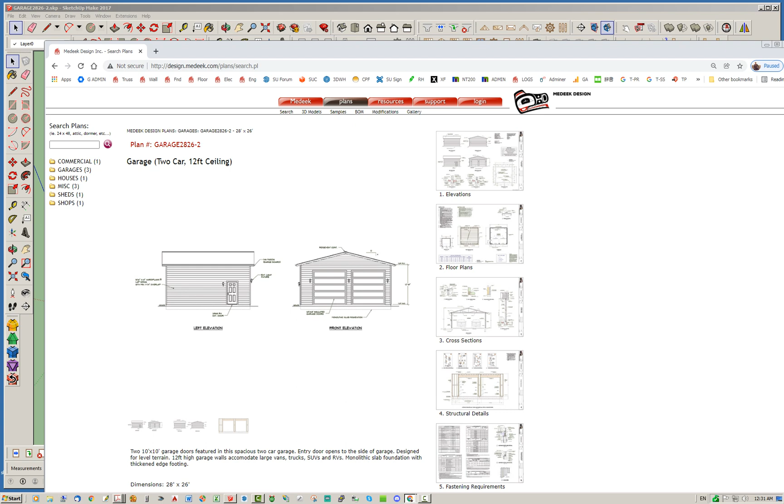I have this particular garage plan that I designed about 4 or 5 years ago. It's a rather small garage, pretty simple in design, basically a box with a roof on it. I just want to take this one from top to bottom. It might take an hour or so, I'm not quite sure. I haven't really spent a lot of time preparing or laying out what I'm going to do, but I have some general ideas in hand.

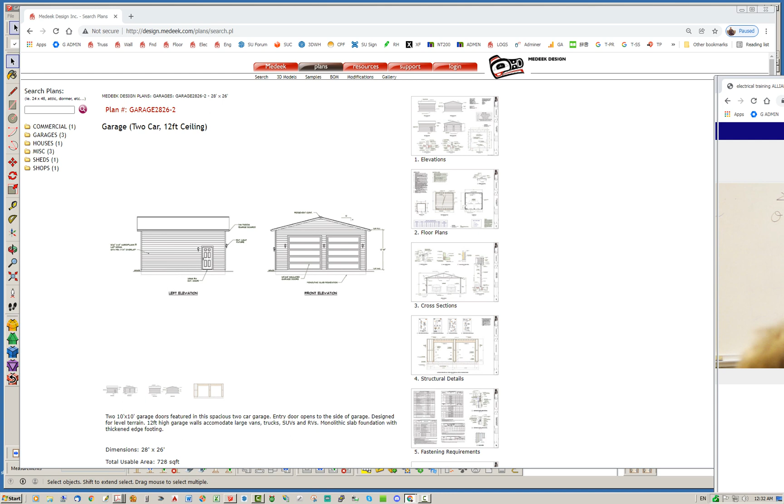So let's jump into it here. I'm just going to close this out. I've gone ahead and downloaded the PDF sheets of all of this. First off, I'm just going to start with the elevations here, just to show you kind of what we're dealing with, so bring those into view.

What we've got is a simple gable roof with a 12-foot wall, a couple garage doors in front, a man door on the side. We don't show a window, but I think I'm going to throw a window on the one wall, just to add a little more interest into the design, maybe on this wall right here, on the opposite wall of the door.

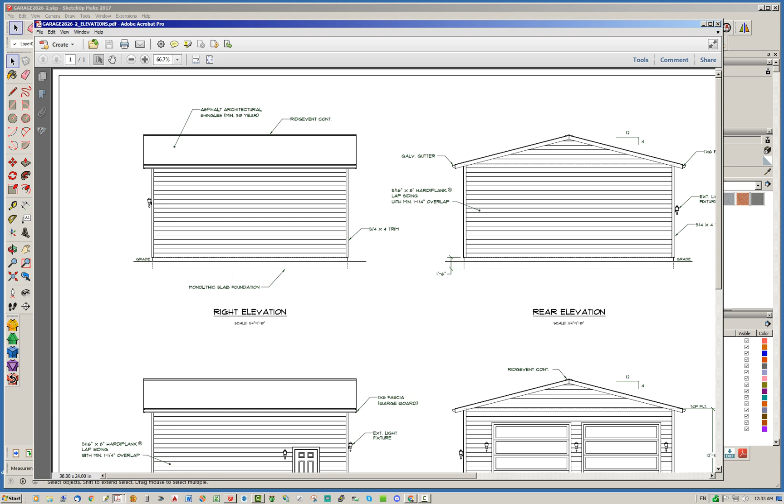Pretty basic foundation, slab on grade. It's a 4-inch monolithic pour, thickened edge concrete slab with some wire mesh reinforcement. You can get an idea what I'm dealing with here. I'm just going to let the plug-in space out these anchor bolts, 6 foot on center, and then we'll have to adjust them a little bit for the doors. But we'll let the foundation plug-in do its thing.

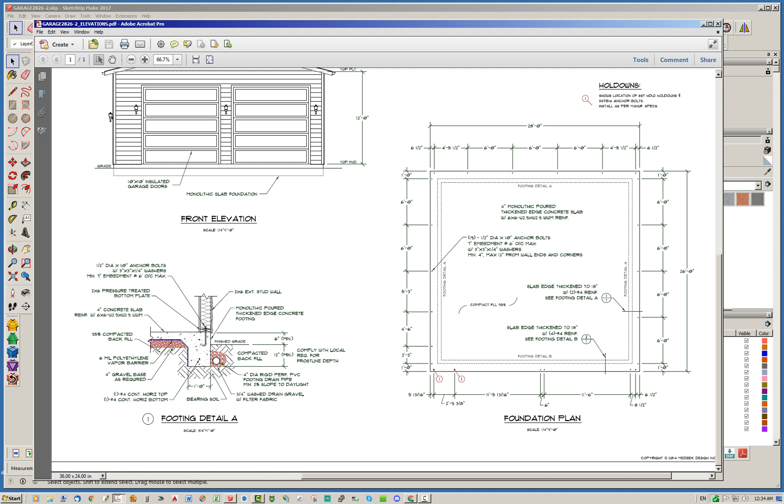So we'll dive into this here, and I just wanted to show you one other sheet. Let's bring up our floor plan here, just so we have that to take a quick peek at. So, it's a 28-foot by 26-foot outline.

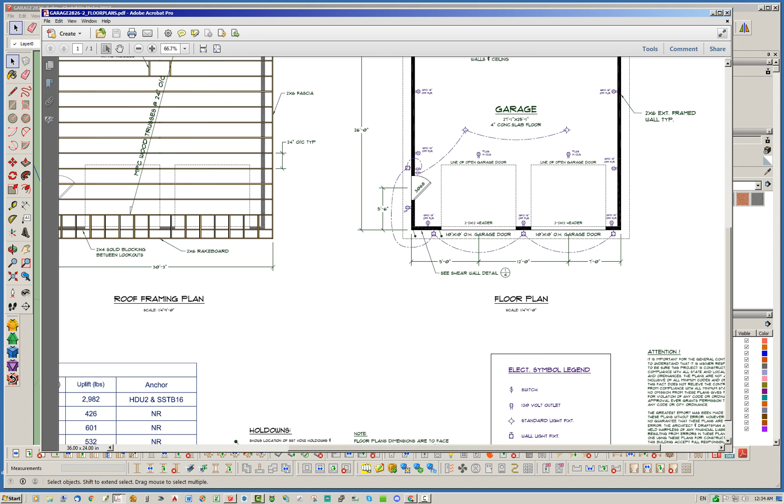Like I said, it's got the door here on the one side, and then we'll go ahead and put a window maybe on the opposite wall, right in the center of the wall. There are 2 10 by 10 overhead garage doors, spaced accordingly, 5 foot, 12 and 7, there in the front.

We're going to have one little kind of shear panel in the front. I haven't really stipulated an actual shear wall, but I did call out a couple holddowns in the original design, and I didn't call out any more holddowns because based on the site it didn't require them. But I think we'll probably also drop a couple HDU2 holddowns on each of those far corners as well.

So yeah, it's a basic design, but I think if we walk through this, we'll get an idea of what we need to do. I might take a little intermission along the way, just to take a break, and I'll pause my recording, then start right back up into it.

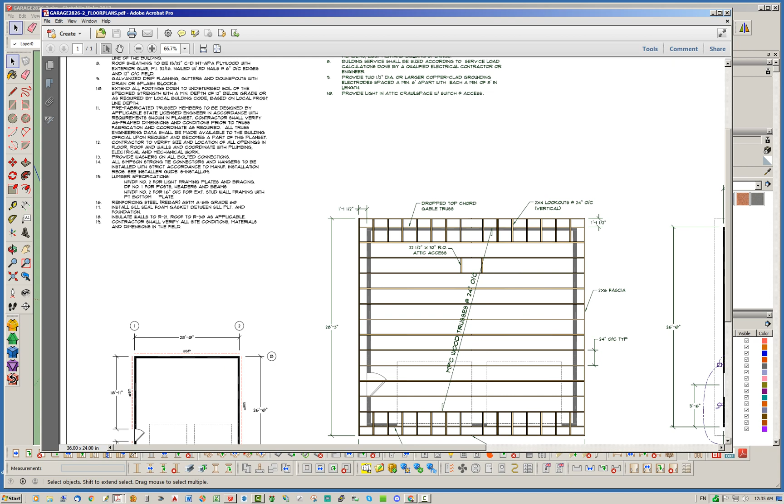Okay, so let's go ahead and look at SketchUp now. With SketchUp, I've just quickly made this little layout, kind of the outline. So let's go ahead and start with our foundation.

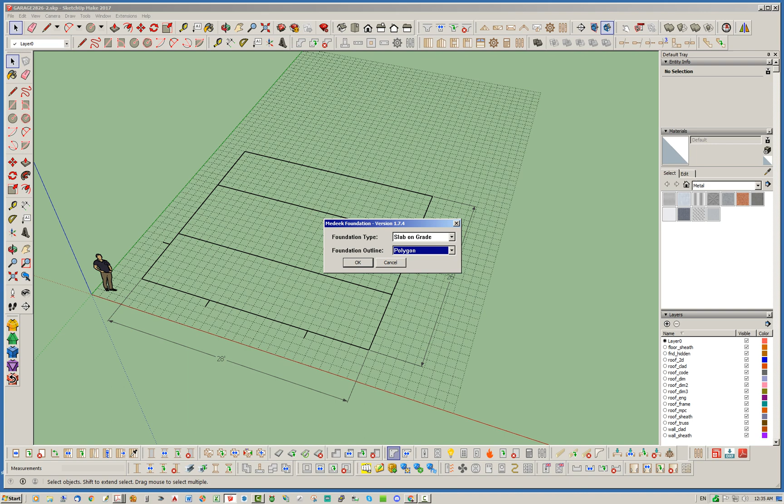So we're going to do a slab on grade, and we'll use the polygon tool only because I just want to demonstrate that. So we'll hit OK. We'll start at this corner, and we'll just stretch out, wrap ourselves around, and we just got to get ourselves back to the start point.

And right there, okay. Once you hit the start point, it recognizes that you've closed the path, and it will then prompt you for everything else.

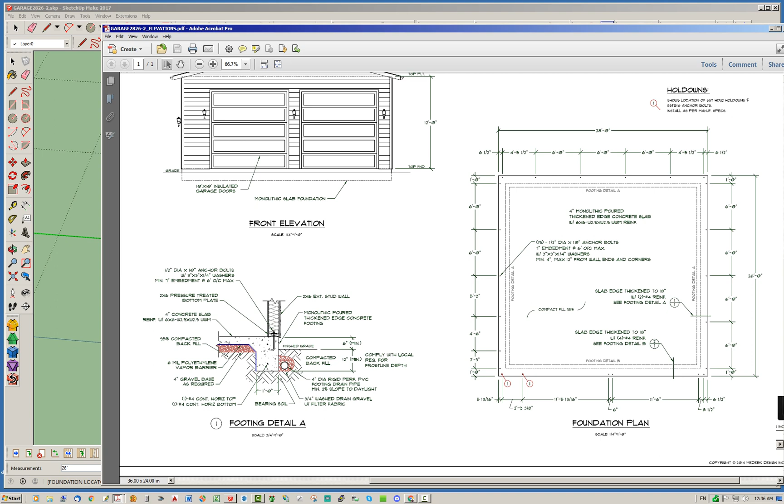Okay, so 18 inches on the depth. I think that's what we had on that cross section, and I think it was also a 12-inch width on the footing. Yes, curb width. No, there's no curves. Reinforcement, yes. Anchor bolts, yes. We did show a drain pipe, didn't we? Let me check my elevation view. I think it was. Yeah, so we showed a 4-inch drain pipe, so we'll throw that in there. We could always edit it later, but let's go ahead and see what we get. Then we'll hit OK.

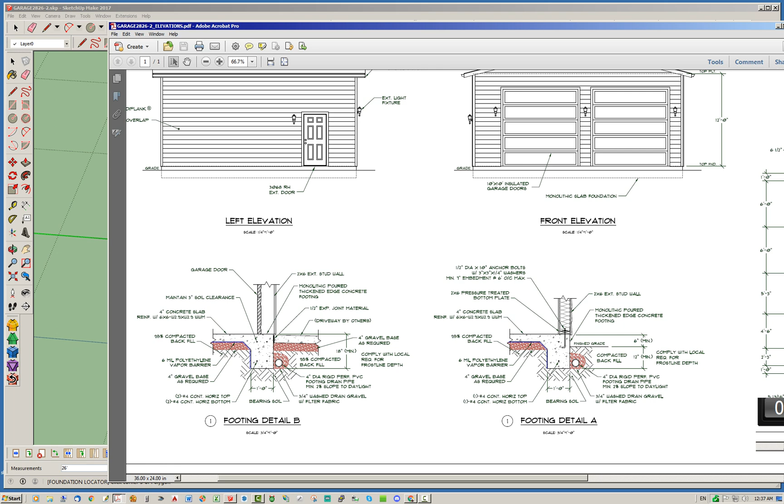Top bar, I think we had 2 and 2, but I could be wrong. Actually, the footing shows 2 bars, probably in the front, maybe 1 bar on the other side. But I think we'll just go with 2 bars all the way around. So 2 bars top and 2 bars bottom. And then let's change this - you know what, I'm going to go with 3-inch number 3 bar at 24 inches on center instead of the mesh. Then hit OK on that.

And then anchor bolt, 6 foot on center. That's correct. And then the pipe diameter, that's fine. Just leave that as default, and let it do its thing.

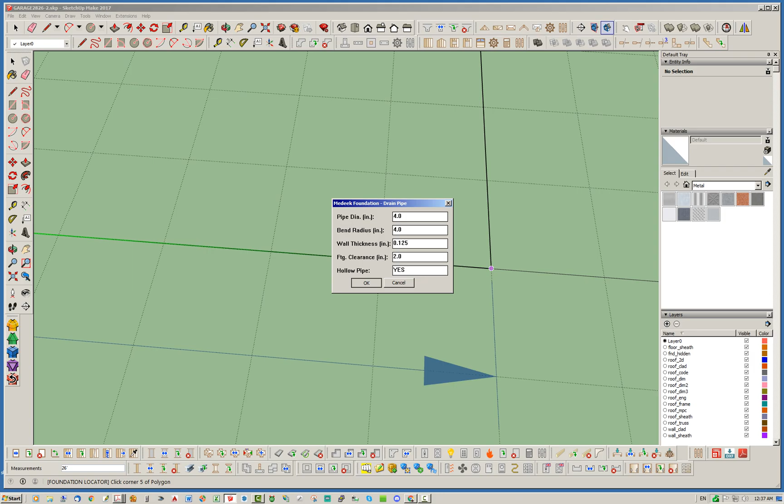Okay, so there's our slab. And just to demonstrate, let's change that opacity a little bit so we can see what's going on inside that foundation. I'll just leave that like that for now.

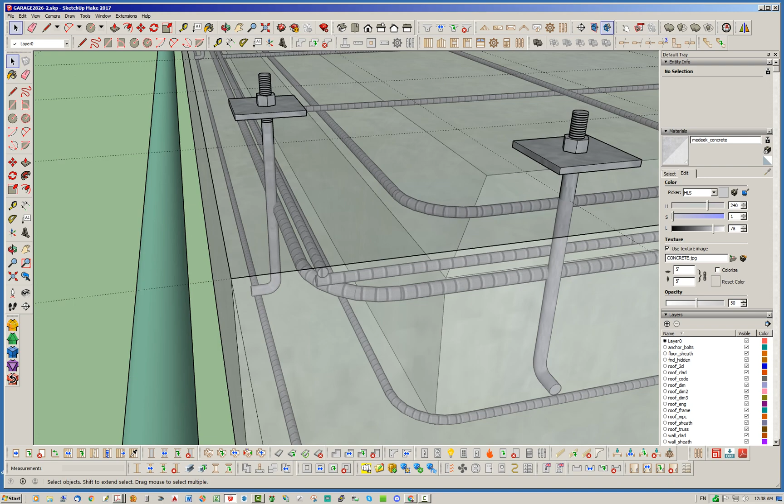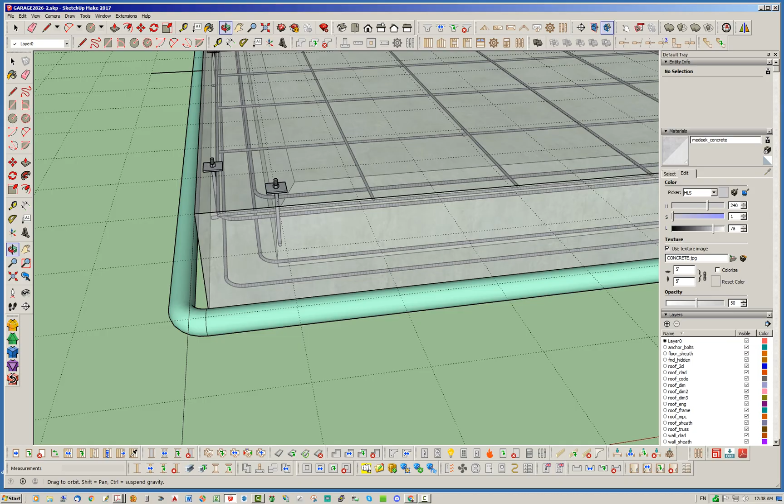Anyways, so we've got 2 bars on top, 2 bars on bottom. We've got ourselves a grid of rebar, and that looks good. We're going to have to probably modify the spacing of these anchor bolts as we go along here, as we can see. We've got some doors and we've got to move things, shuffle things around a little bit, but we'll get to that.

So that's our foundation. Okay, so let's go to the walls next.

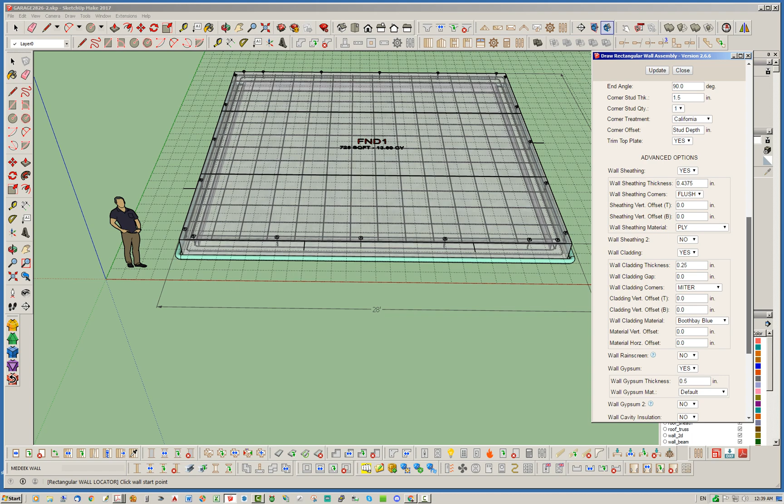So I'm going to bring up the wall tool, just a regular interior exterior wall. The wall height in this case is 12 feet, so 144 inches. 2x6 walls, stud spacing's fine, top plate thickness fine - pretty much everything default. California corners are fine. And we're going to go with that Boothbay Blue, I guess. Okay, so we just hit update on that.

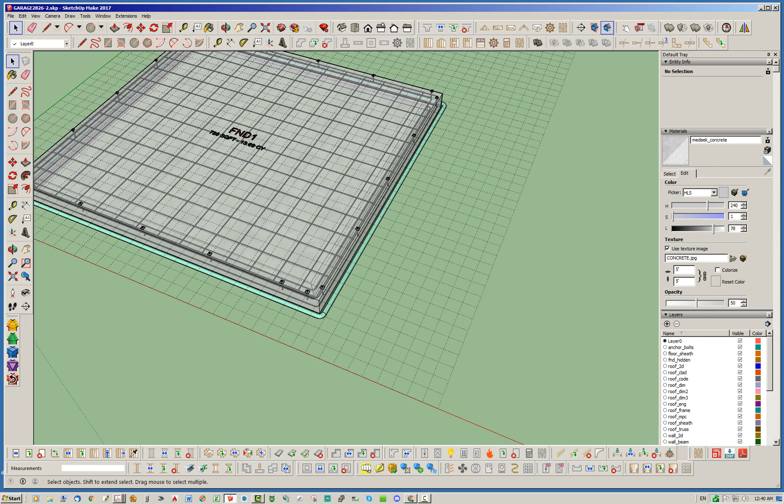Actually, before I do that, I'm going to just hide this - I don't need this right now. And actually we don't even need the grid, but we'll leave the grid for now. Okay, so let's go back to our wall tool. And sorry, we have to put that back in there.

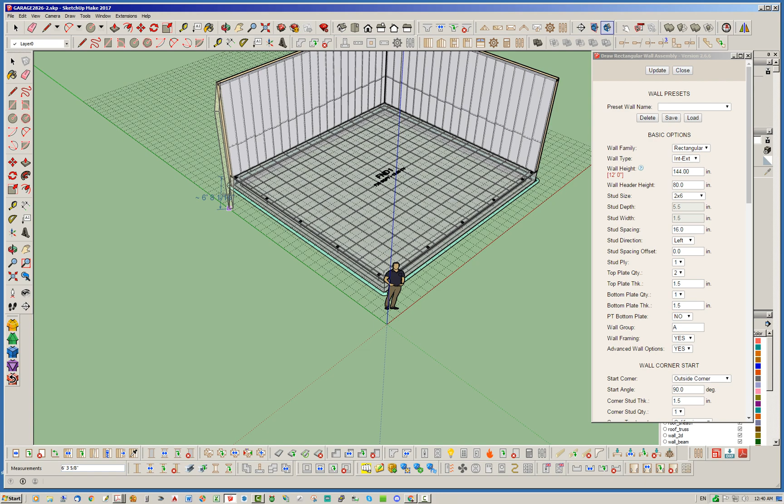Okay, so we just start at the corner and we start wrapping our way around. Pretty basic here. And then as we get to the end, we just hit our space bar - that jumps us out of the tool.

Okay, and it looks like we did the right direction, because you can see with the way this laps, that means this is the outside corner - the inset outside corner. Just to verify that, we'll turn off the cladding, wall cladding right now. You notice all these layers here - we've got layers being created automatically by the plugin, and that's controlled within the global settings of the plugin, if any of you aren't aware of that yet.

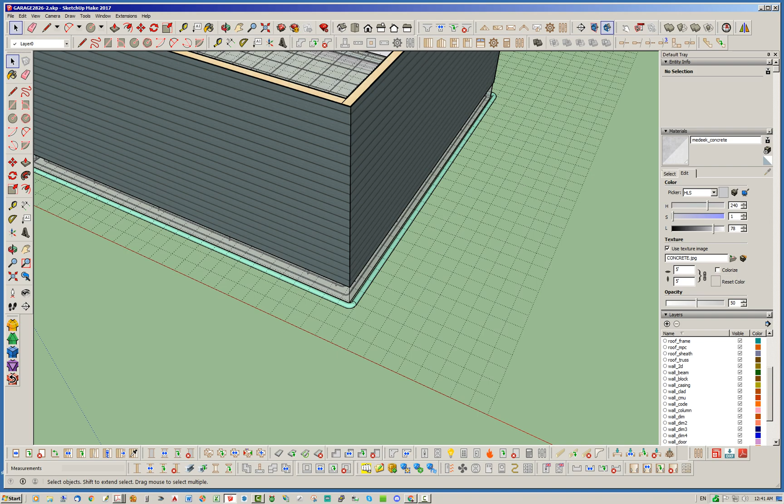So yeah, it's quite tall walls - 12-foot walls are pretty substantial, so it's actually a pretty good sized garage. And let's turn off the sheathing and the gypsum for now - we don't need those on.

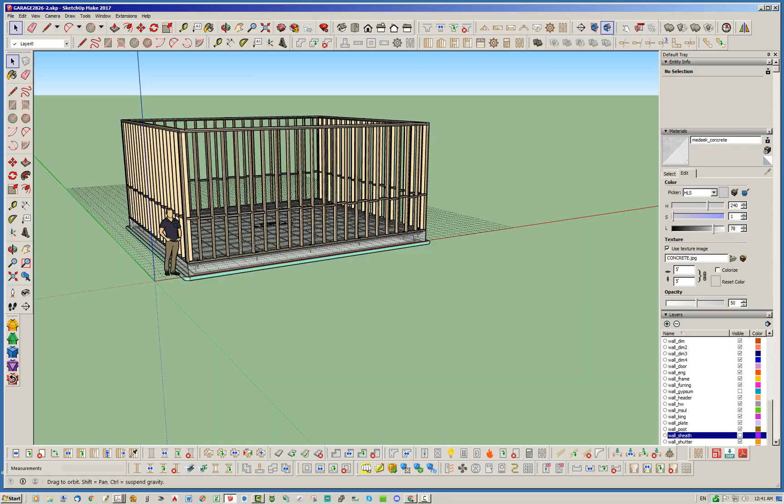Wall sheathing. Okay, so as you can see, we've got pretty big walls. Blocking wise, yeah, I'm thinking probably want a little more blocking there.

We've got blocking set showing on this one view here. I think we have it set at like 6 foot, but it might be useful to set that differently. In this particular case, you'd probably run a sheet of plywood vertically with 8 foot spans and then a 4 foot section. But yeah, I don't know.

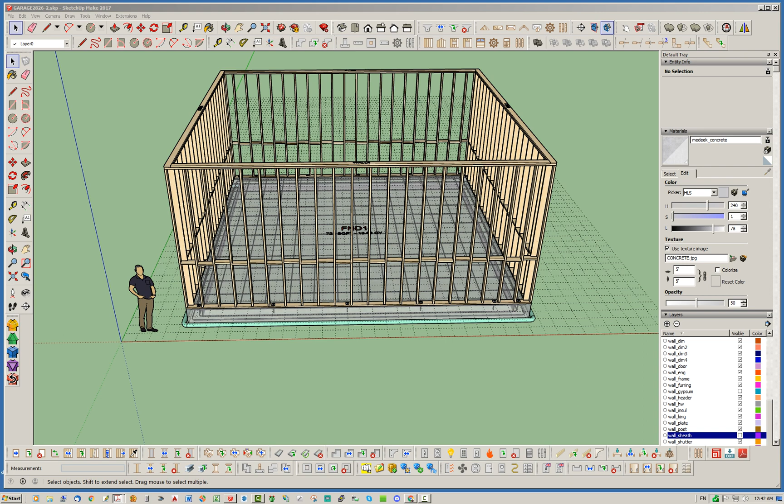Let's go ahead and just edit this wall assembly real quick, and we're going to change the blocking to 48, and then let's do 2 rows of blocking. Let's see what that looks like. Yeah, I think I like that a little better.

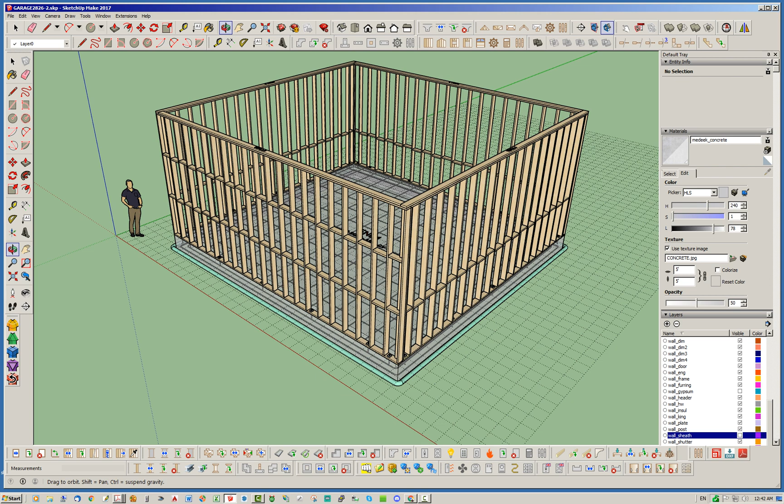Okay, so we could go around each one and edit, or we can just use the wall copy tool. So I'm going to grab this one, go down here, turn on the blocking row spacing and blocking rows, hit update. Now when I click on any other wall, it should change just those 2 parameters.

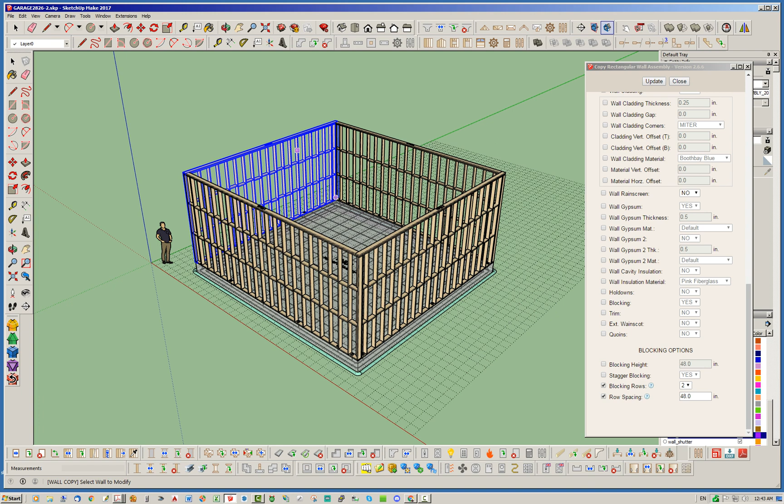And it looks like we are doing what it should do. Okay, well, excellent. So we'll close that out. So now we've got ourselves 4 walls.

Okay, so let's go back here and just look at this elevation one more time, make sure we're getting kind of where we want. Okay, so now I guess we can start dropping doors and windows into it.

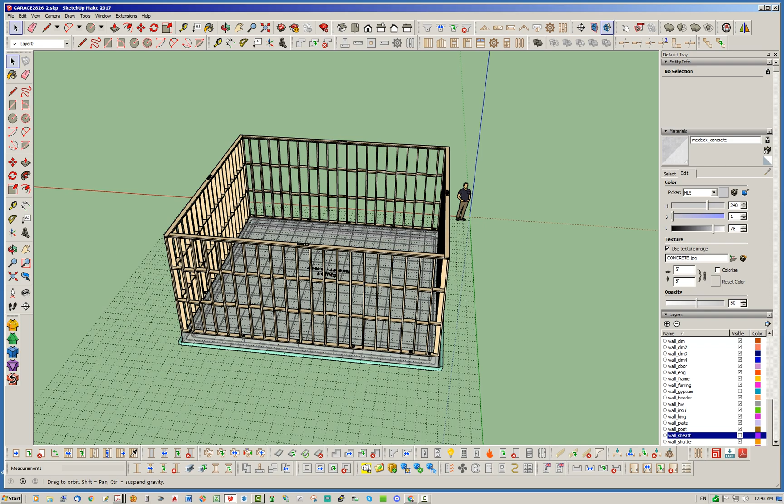Let's start with the man door, and we'll unhide our little layout here. It shows on the floor plan that the man door was positioned 5'6" from the corner.

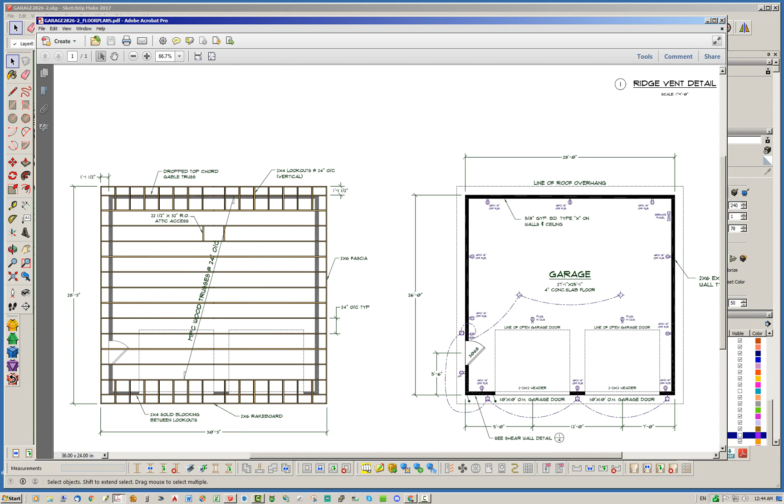Yeah, I mean, I could do that, I suppose, but I think I'm just going to put it at 6 feet. I don't think it really matters that much. So we'll just do that.

Okay, so let's grab a door here, and let's change our door header. The door headers, too, I noticed when I originally drew this plan, were kind of a foam insulated type of dealio. You can do whatever you want.

I'm going to go with, maybe just a couple. I don't know. Let's do a 2x6 fill ply header. How's that sound? I mean, it's probably overkill, but we'll just go with that. And then...

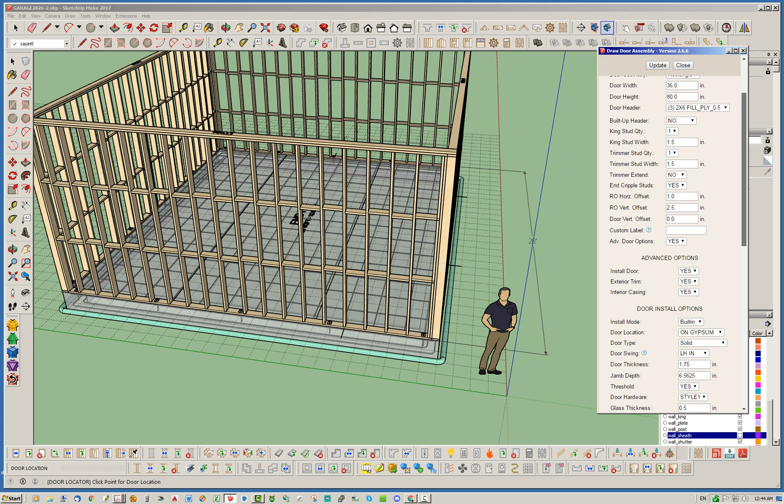Well, let's just create the door and then we can always change it up. Anyways, all the options are turned on, the install door, the exterior trim, and the interior casing. So when we mouse over this door, it should create what we want.

Okay, so the door opens the wrong way. That's fine. We'll just edit the door and change it from a left hand to a right hand in. Okay.

Also I noticed on the elevation view we showed a deadbolt. So in that case we can change up our door hardware style. I think style 2 includes a deadbolt. Oh no, that's the little other style here. Let's go to style 3. Yeah, there we go.

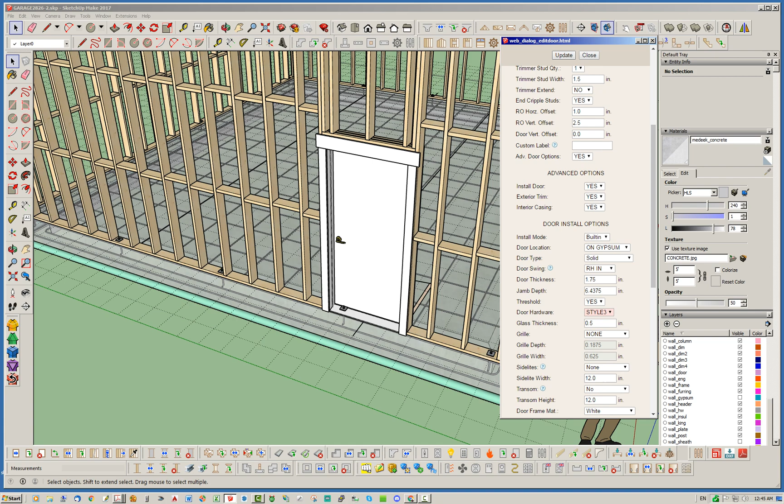Okay, so there's our man door. We could change up the case, trim, etc. Let's see here, what do we got? Okay, so I don't like that trim. Let's just go with something a little more basic.

Yeah, I have it overshooting on the trim there. So down here you can see you can change the header width of the trim to whatever, and then you can change the header extension down here to 0. So we'll go ahead and do that. Hit update, and now a little more basic standard type of trim.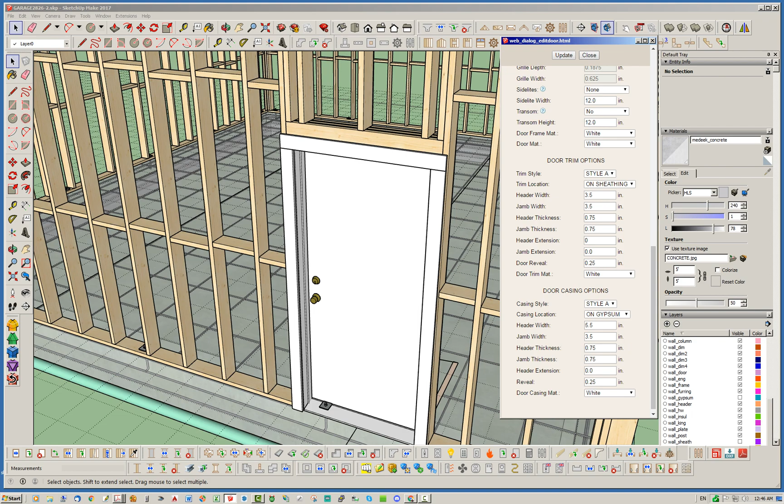Okay, yeah, so back to the header real quick, it's a triple 2x6 header. Let's turn off the wall casing, or wall trim, it doesn't really matter, for just a second here so we can take a look at that. Where is the wall trim? There's a lot of layers. Yeah, there we go.

Okay, so we got a 2x6 triple header. Yeah, that should suffice. Now notice how this anchor bolt is in the way. We'll deal with that once we get all the doors in, then we'll work on that.

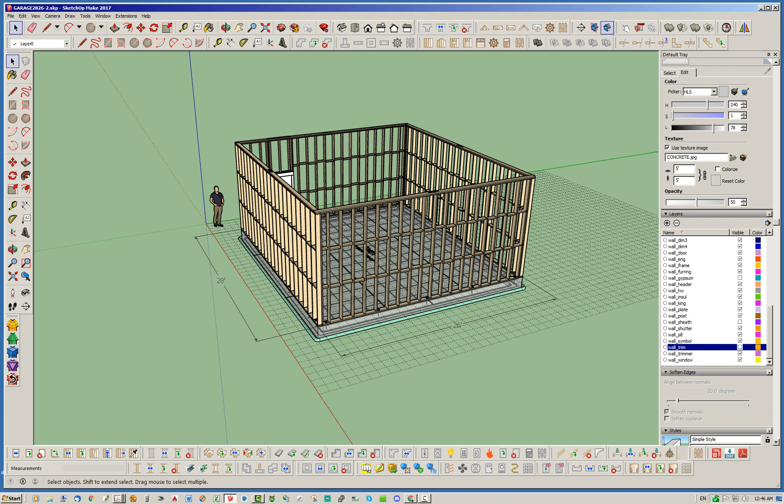Okay, so let's go over here now real quick, and let's throw a window in. We don't have a window on the original plan, on the original elevation views either. I just thought, for interest, we might as well throw a window in. I don't think it'll hurt.

So let's get a 36, 48 inch high. Let's say a... I don't know, we could have a couple windows actually. Maybe we'll do a couple windows. Maybe that'll look better. I don't know.

It's kind of boring not to have some windows, so let's go with the same headers as the other one there. Let's go with the filled ply header, and let's try a couple of these windows.

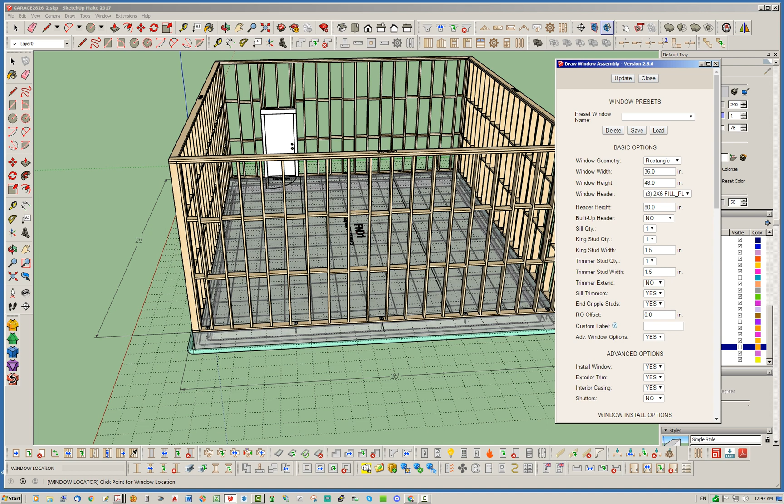36-inch windows, that looks about right. And you can see here as you mouse over the wall, it's giving you the distance from the end, as well as from the other end - 8 feet from one end, 18 feet from the other. I have both of those dimensions turned on.

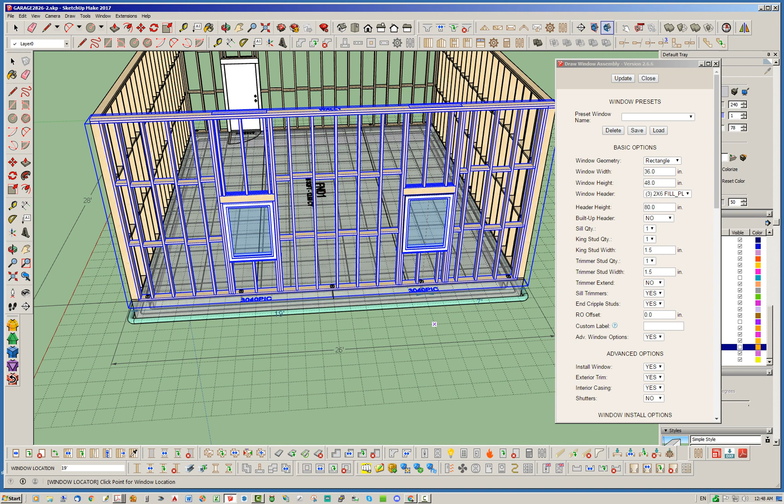Okay, so yeah, I think that looks great. I think that looks pretty good. So, 2 basic windows.

Maybe we want those to open or something, so let's change those up as well. I think right now we have them set as a picture window. Let's turn them into a single hung window.

I like the fact too that we can put a manufacturer's label on it, just so we know what we've got here. And I'm just going to hit update on that.

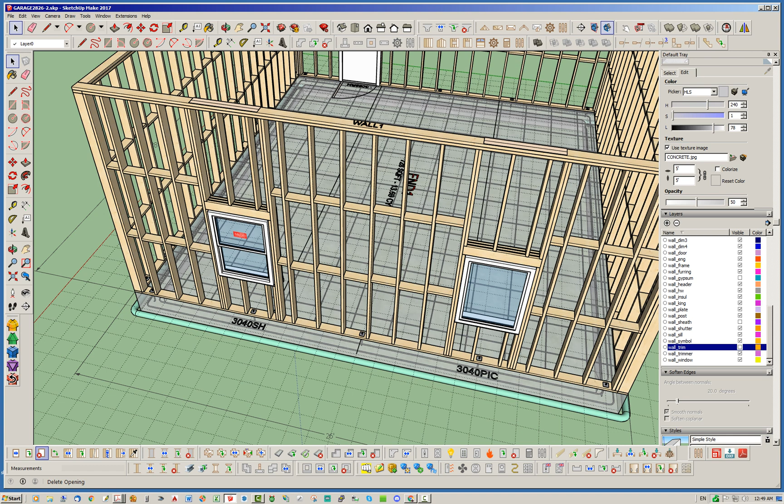Okay, and I'm going to come over here and do the same for this window, and change it to a single hung window, and then turn on the manufacturer label.

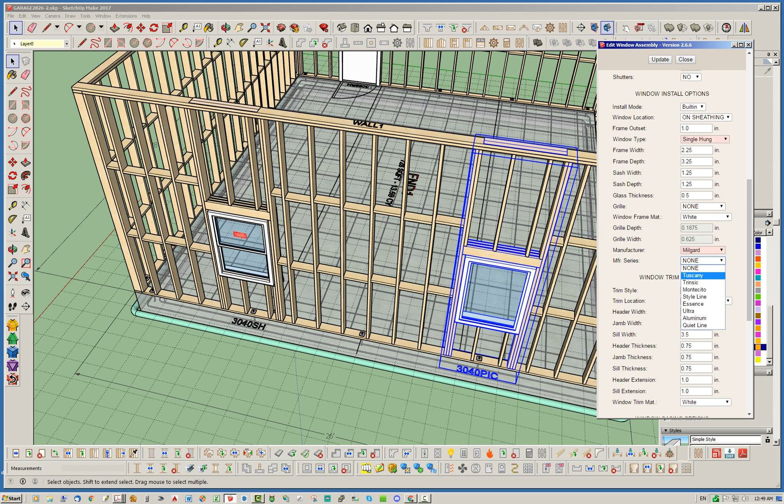Notice I have quite a few manufacturers. You can even put a manufacturer's serial number in there, or series number - well, not series number, but different series, some of them have numbers. Anyways, it's just whatever you want, but I'm not going to worry about that too much right now. I think that's a little bit overkill.

Okay, so we got our windows, we got our doors. We need to put the garage doors in next.

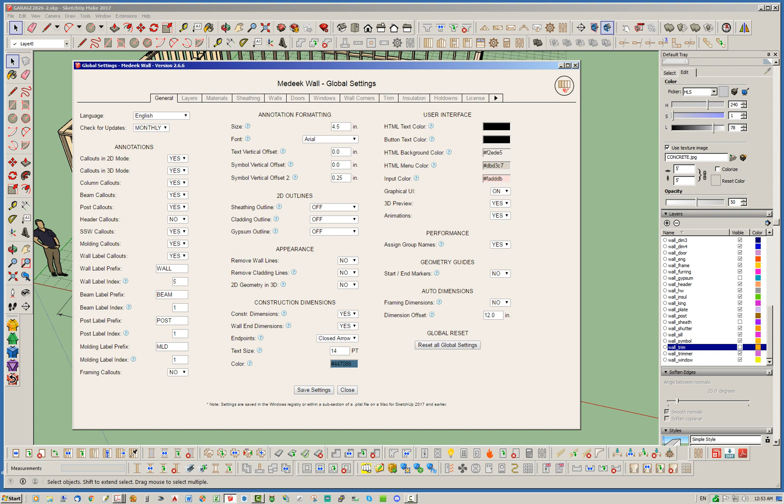So if we go to the global settings of the plugin, and then click this little arrow to get to the second page, we can go to the headers, and the headers library allows us to create, delete, or modify any of our headers that we have available to us.

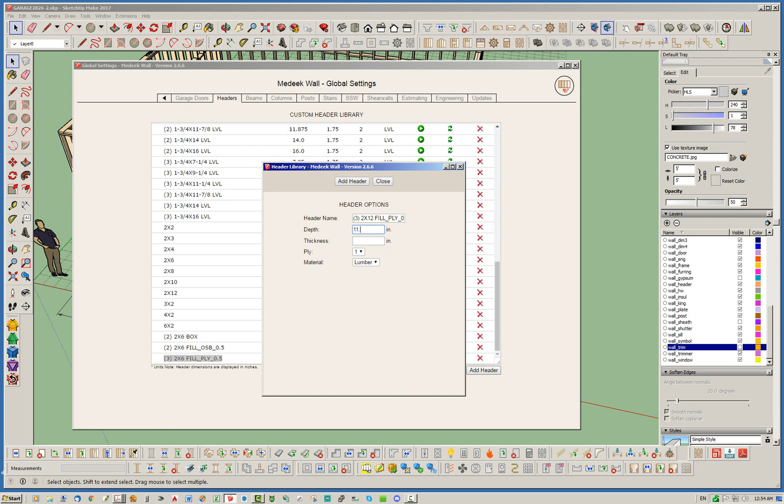So similar to this last one listed here, which is a 2x6 header, I'm going to create a new one. I'm going to drop this description in there, and just change this to 2x12. The dimension for the depth is 11¼ inches, the thickness is 1.5, and it's going to be a triple ply header. And we just hit add header.

Okay, so now you notice we have the 2x12, and you'll notice here, as I've described in another tutorial video, that you have this specific keyword combination. What this basically tells the plugin is that it's going to be a filled header or spaced header with plywood, and the thickness of that plywood is 1/2 inch thick. So that will instruct the plugin to generate the header exactly like that.

And the triple ply, this variable right here where we have brackets 3, 2, that actually doesn't do anything - that's just kind of for our own reference, so we know it's a triple ply header.

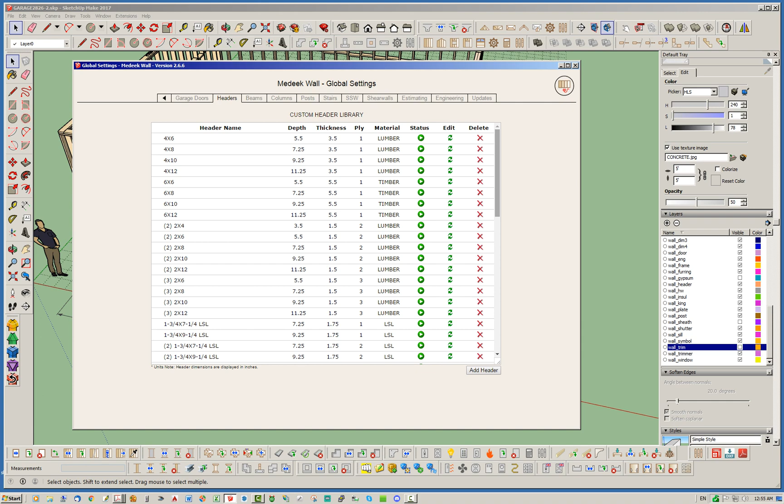This 3 tells us triple ply, so that will tell us we have a triple ply header. And of course the material we chose is just regular lumber. So let's go ahead and jump out of that now.

Let's go ahead and try creating a garage door. Basic garage door, we're going to do 10 feet, which is 120 inches high. And again, here at this stage, we select that special header we created, and right here we've got it.

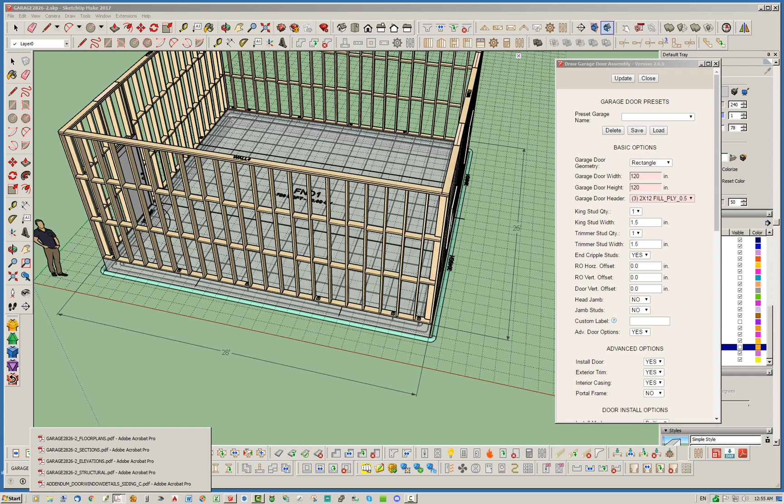I noticed on the framing, let's go back to that really quick here. On the framing plan, we showed like a double king stud and a double trimmer, so we can do that. We're going to go ahead with our double king stud and double trimmer. Hit update. And end cripple studs, sure, we can turn that on.

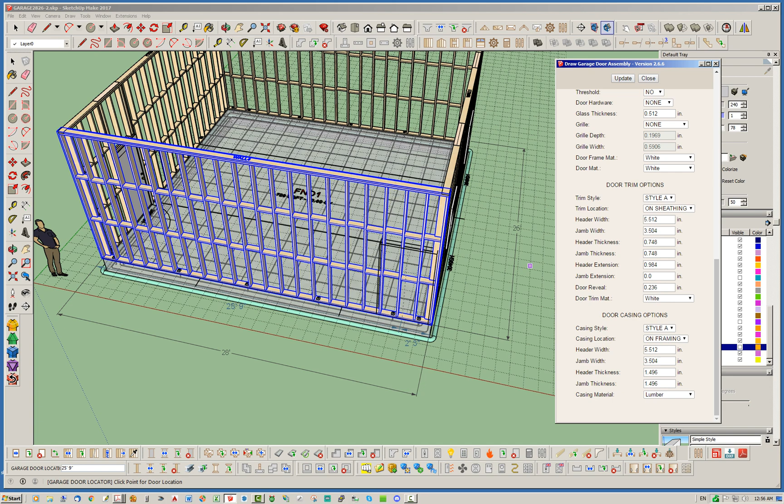We do show jamb and head jamb, but let's just leave those for now. It's not a portal frame. We have exterior trim, exterior casing, or interior casing turned on. Pretty much everything's turned on. We'll just leave everything default for now and see what we get. So we'll hit update one more time just to make sure, and we show our door.

I'm going to position this one at the 9-foot point, and I'm going to position this one at the 7-foot point. Let's just double check to make sure those two doors are where I think they're supposed to be. I already made these little points, but I just want to triple check that.

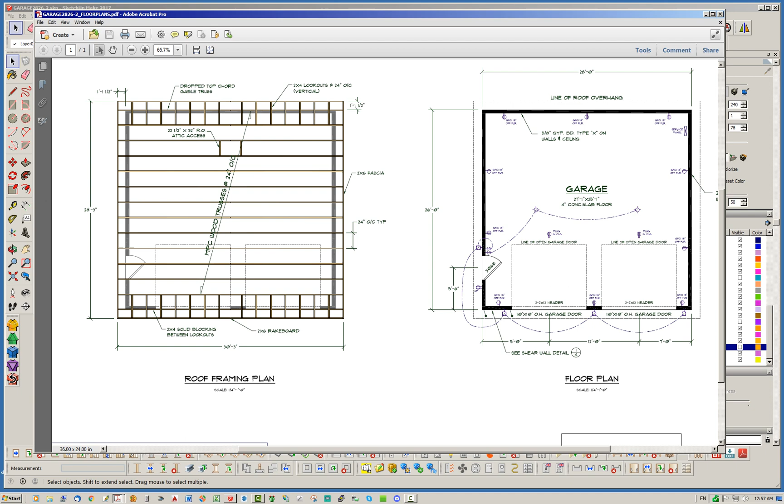So let's go back to our floor plan. And yes, 7 feet off the corner, 12 feet apart, 9 feet. Okay, so I think we've nailed it.

And instead of 2 2x12s, we've got 3 2x12s, a little beefier, but I don't think that's going to hurt us at all. You notice the door looks a little different than the elevation views because actually it is a little bit bigger. I think in the elevation views it showed 5 panels, and this one we've got 6 panels, if you remember this view right here. And that's fine, we'll go with that.

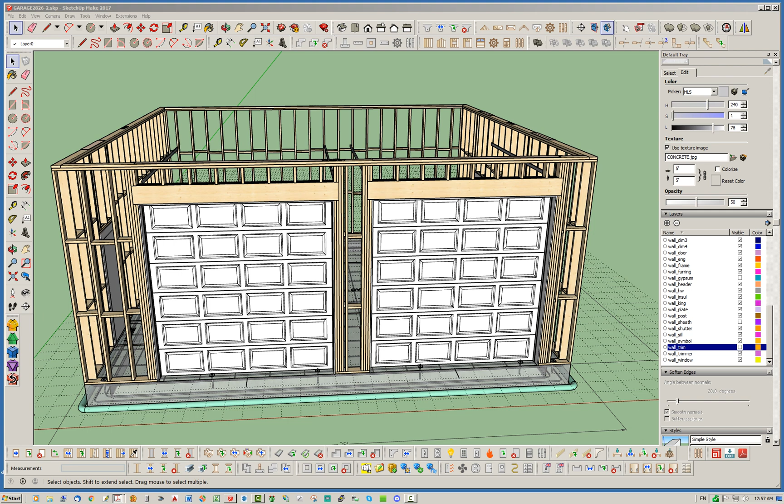Let's do one other thing here. Let's turn on that wall trim just so we can see what we got there. Okay, yeah, so we wanted to change that up just a little bit and maybe turn on the door handles while we're at it. So I'm going to click Edit Opening. I'm going to come down here to the...

I don't know why these numbers are so crazy, but they are. I think I set this up for a metric system at some point. So anyways, it's roughly, roughly there. Anyways, we'll change this up, it won't take me a second.

So header thickness 0.75, header extension 0, door reveal 0.25. Okay, that's better. And then the door casing option, you can see that they were metric approximations because I had run some metric stuff in here before. But yeah, we're not doing metric today. All right, I think we fixed that for the most part.

Well, no, one more thing here. That's fine, the jamb thickness, just leave that as is.

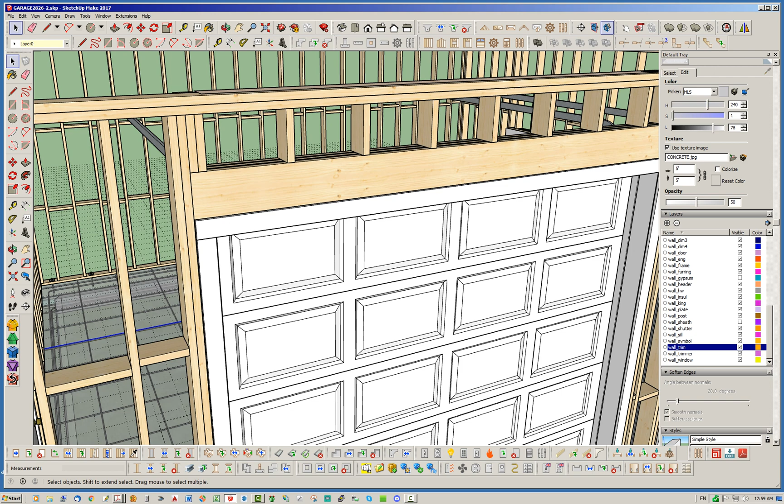Okay, so also in the structural view, we showed we had a top and bottom above that header. Let's see if we have that option available to us. I don't remember the built-up header thing, right? I can't remember if I added that in or not. I don't think I did. So we'll just go with the default here for now.

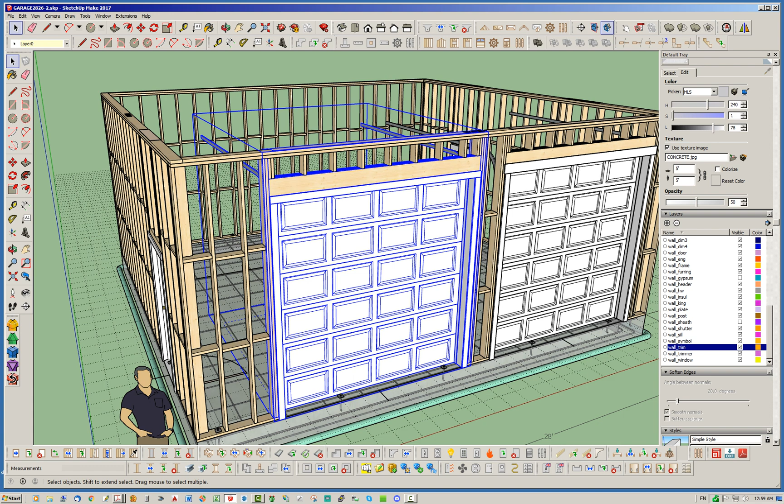Yeah, that's fine. And then I'm going to go ahead and fix the other door dimensions as well. I'm just going to pause you for just a second and we'll jump back in.

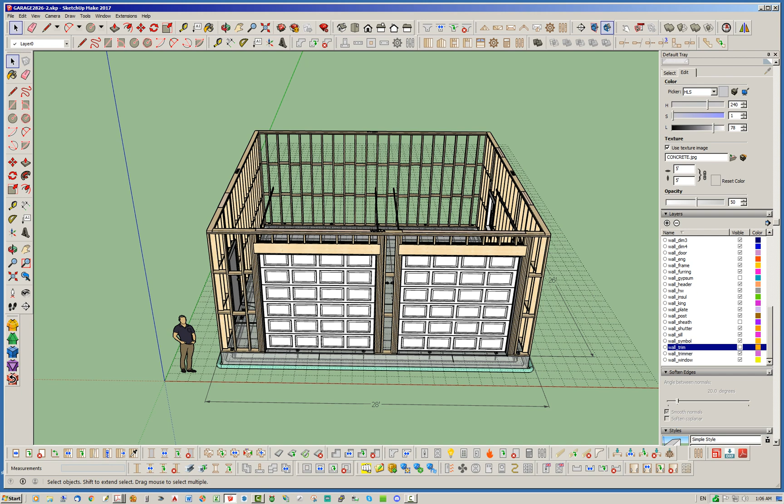Okay, and so we're back. I just want to turn off the wall trim for a second now because we're going to go ahead and add this shear wall panel. So there are a couple ways we can do this. I do have the ability to just add hold downs at the end of the walls, but I want to actually try to use the shear wall module as it's constructed, and so I'm going to try to demonstrate that.

So I'm going to go here and click the draw shear wall, and I've already kind of set it up. We're going to use triple 2x6 posts, just like it's shown in the plan, and HDU2s with SSTB16s.

These are all Simpson products, on both sides.

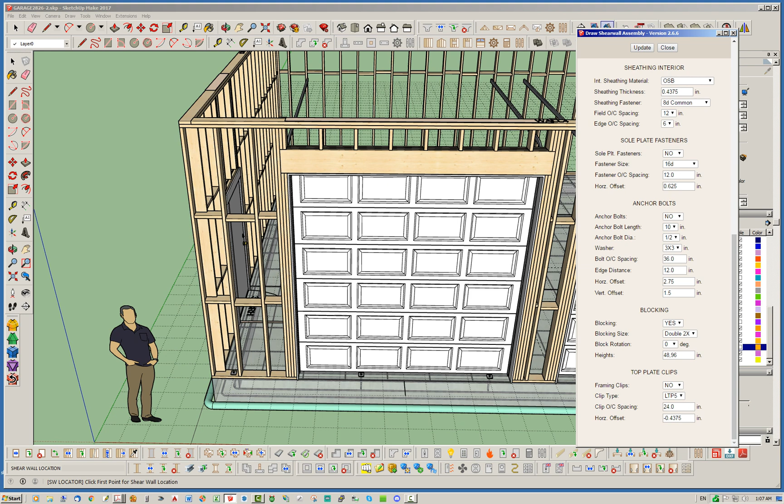Let's see here, we'll just leave that. I've got blocking set up, a double 2x blocking, which is basically two 2x6s nailed together and positioned at the seam where the plywood or sheathing is, and they're in line. We're going to run a row at 48 and one at 96, just like shown here, but on the shear wall.

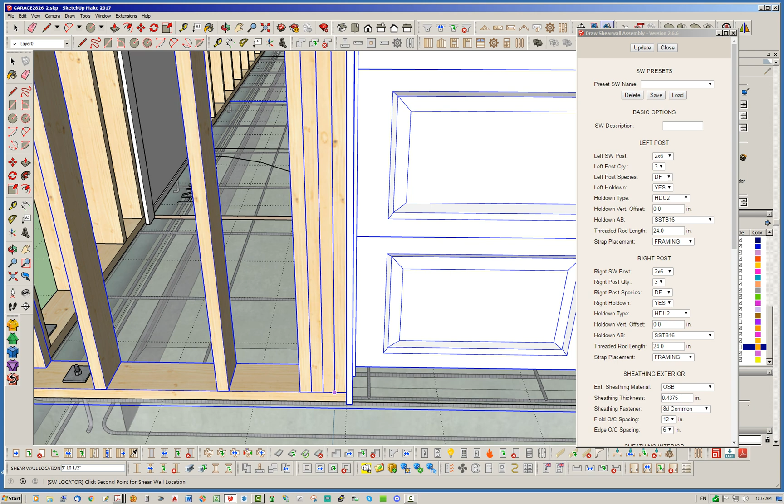So let's go ahead and hit update on that. To do a shear wall, you just mouse over the wall you want to place it at. We're going to start right at the corner and run to this point, a third stud in. And you can see that we've got our shear wall.

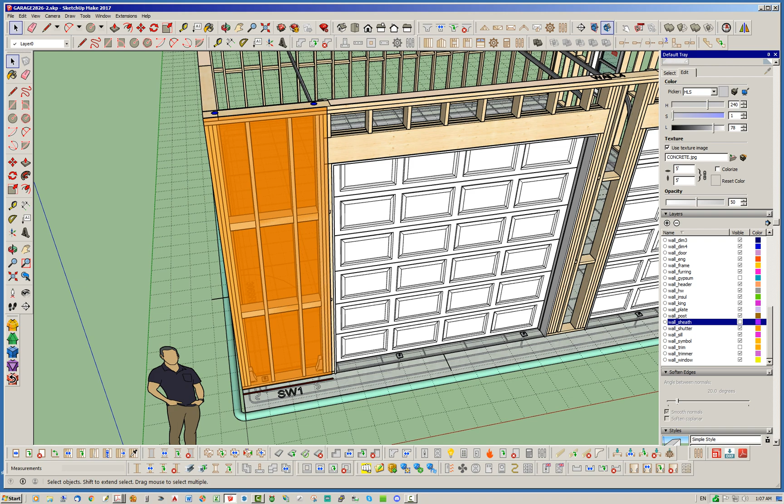Really, the sheathing of the wall itself can provide this shear wall material, and that's why I show it as a kind of transparent overlay. It just helps you see that this section of plywood has to be nailed off at a much stricter,

aggressive nailing pattern, I guess is the best word. For instance, maybe it's got to be nailed off at 4 inches along the edge and then 12 inches on center in the middle. Anyways, the other thing I noted too is that

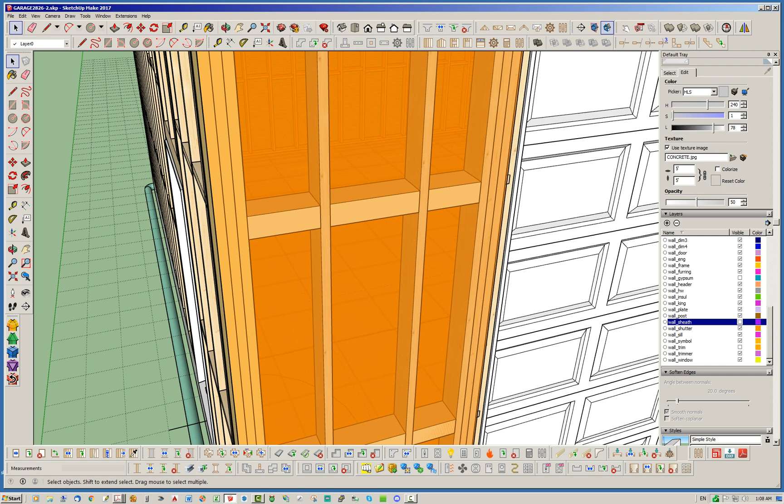the 2x blocking, when doubled up, shows as one solid block. I may change that eventually so it shows as two blocks, because that's really what it is, but for now that's what's shown.

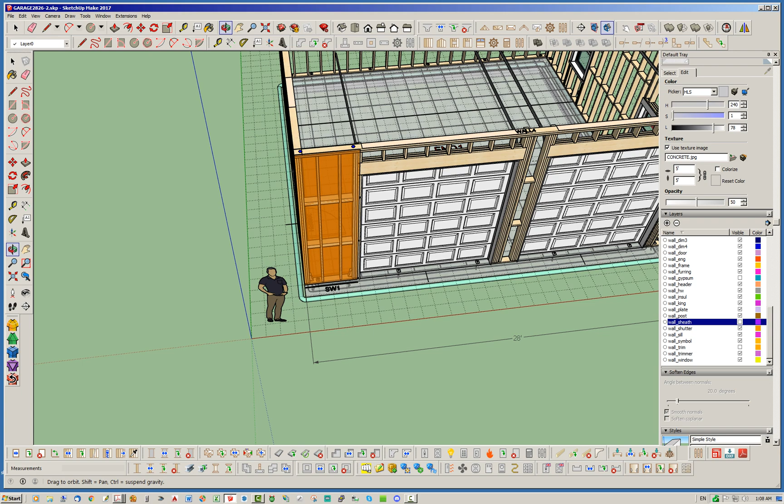Notice that your hold downs are shown on the top view of the wall, similar to how your doors and stuff are shown, and you also have this down here showing that that's a shear wall. So we've got our hold downs, we've got that. We may want to move that anchor bolt, and we are going to want to move that anchor bolt as well. So yeah, we'll get to that.

The other thing I wanted to say is that one of the things I would typically add in is some hold downs, strap hold downs, generally right at these doors where there aren't really any shear walls. But I don't have a system yet for just adding in hold downs, so what I'll do is manually add those in and make them what I call a custom object within the wall, so that when the wall gets regenerated, it does not delete those hold downs. We'll show you how that can be done.

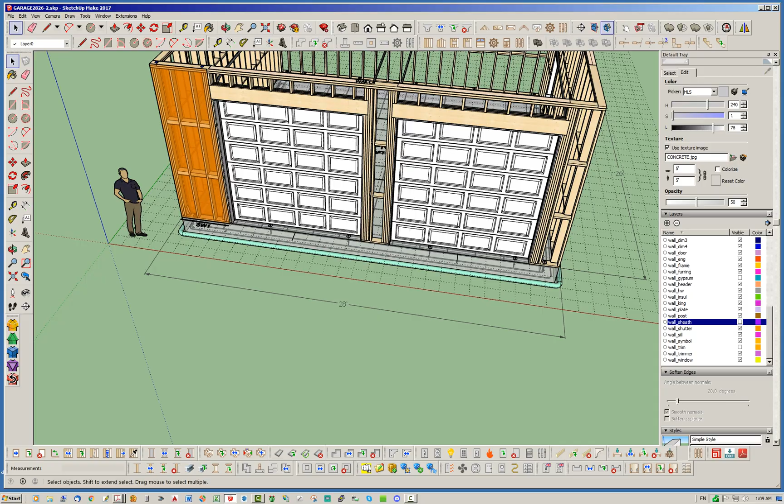The other thing is, at this corner of the wall, I want to strengthen things up a bit on this garage because it's pretty tall and big. So I think what we'll do is edit that wall and change this to a triple stud on the corner. Edit wall assembly, and it's just on the end wall condition here we're looking at, I think, is what we want to try to do.

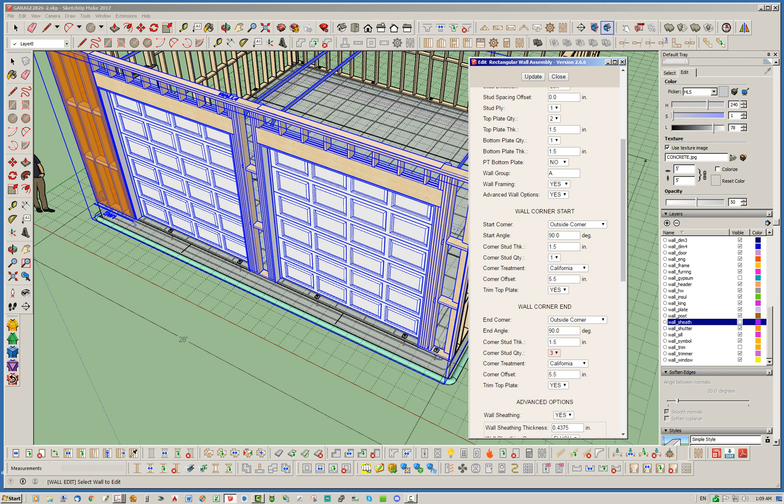Okay, and so now we've got ourselves a triple stud. This wall, of course, we don't need that, but let's go over to our other wall here, and we'll edit that and bump it up to three corner studs, triple studs.

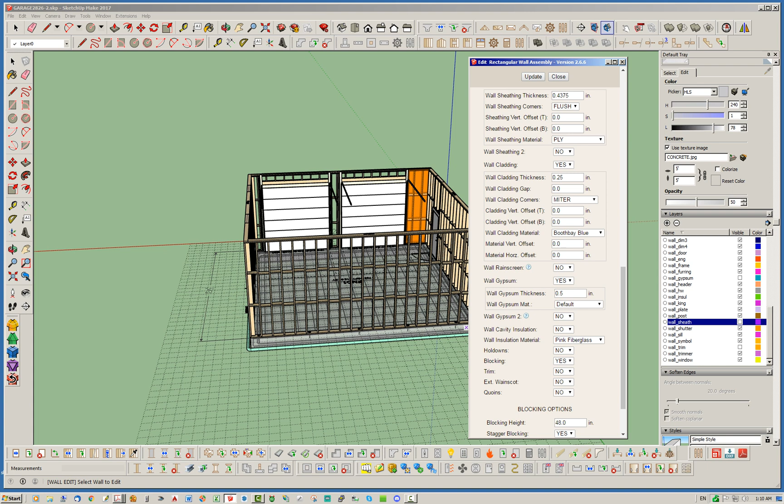And while we're at it, we're going to see if we can't add some hold downs there as well. So if we go down here, the general wall features, we have the hold down option. If we turn that on, we can change that to a couple HDU2s, SSTB16, and then hold down locations both, yes. Then hit update on that, and let's see what we get.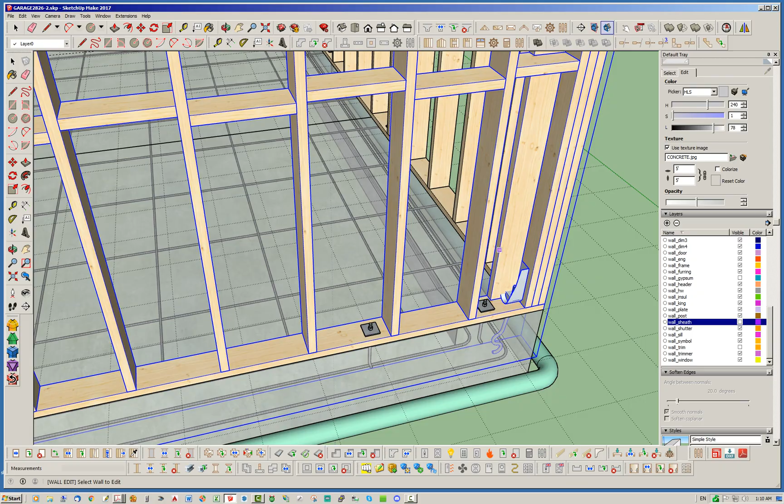Okay, so that looks good. Notice we've got ourselves hold downs. Of course, you've got that piece framed in there, you'd have to probably notch that out, but that's just framing details. Okay, and notice you've got hold downs now shown there.

So this is technically not a shear wall. It's got enough, I guess what I'm going to say, there's enough shear strength in this entire sheathed wall that you don't really need to call that a shear wall and nail it off with any special nailing pattern, just the standard one you would normally use. But I do like to put hold downs at the corners.

Okay, so now we've got this issue where I would like to place hold downs at the corners of each of these doors. What I'm going to do is use an in-wall column, and I'm actually going to delete the column eventually, but before I do that, I'm going to turn on the hold down option, and run with one of these STHD14s—well, it could be a 10, I suppose. Let's go with 14.

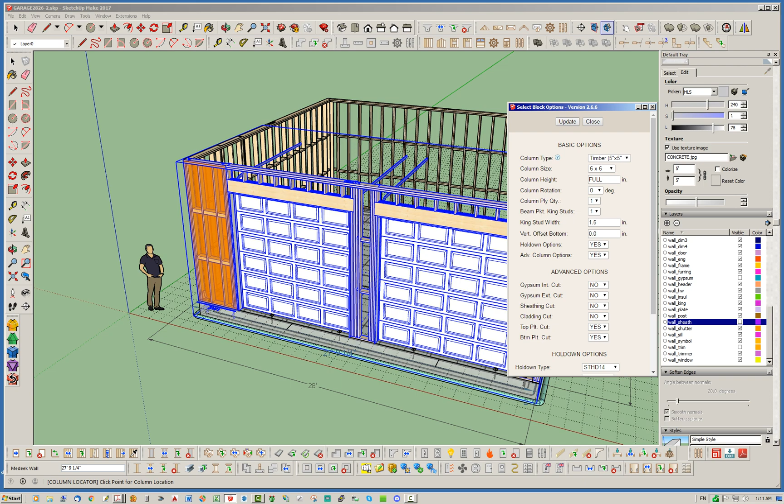And of course, we don't need to worry about any of this. Is it on the framing? Sure, that works. Let's hit update on that. So what this is going to do is give me a column initially.

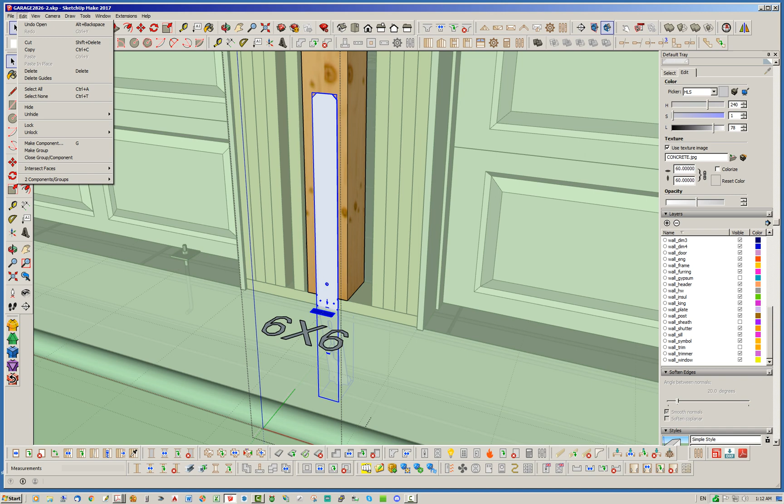Okay, now what I'm going to do is jump into this wall and grab this little guy out. Yeah, let's grab that. Okay, and then I'm going to cut. Then I'm going to jump back out, and jump back in really quick here, and I'm going to paste in place.

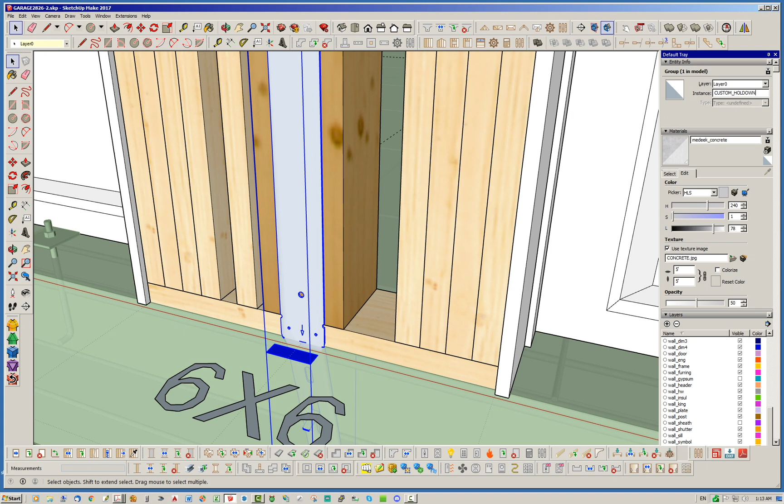Okay, and then I'm going to call these two items—well, actually, I'm going to group them. Make a group out of it. Oh, not a component, sorry, make group. Okay, and then I'm going to scroll back up here and call this custom hold down. Let's call it 1 for lack of a better word.

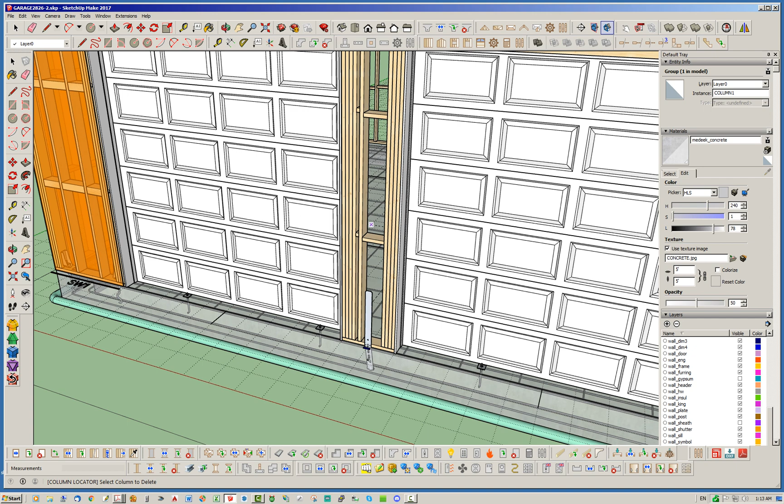Okay, and then I'm going to jump out, and now I'm going to delete this. Notice I didn't actually delete the column itself—I'm going to use the tool to delete that. So I'll click here, delete column, mouse over it, and it should remove the column. And now we've created this group within the wall.

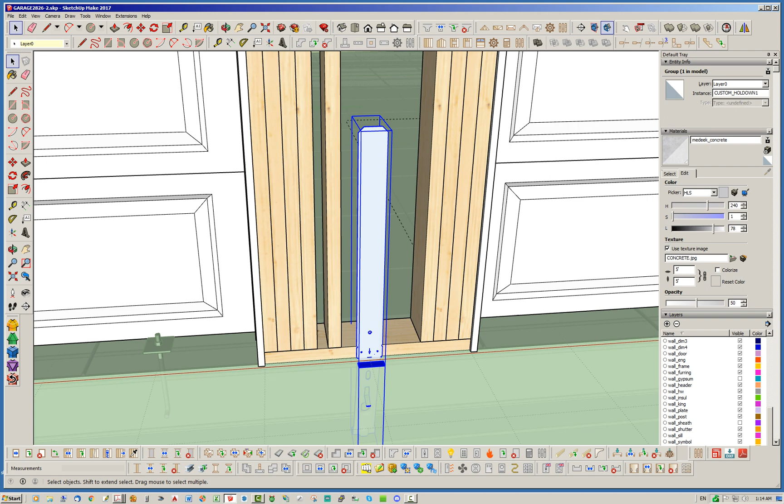Notice how I assigned the word custom in there, the keyword custom, and then put an underscore. It doesn't have to be an underscore, but I put that to delineate whatever else I want to say about it. So now I've got this in here, and I can do whatever I like to it—I can move it around. You know, it doesn't really matter.

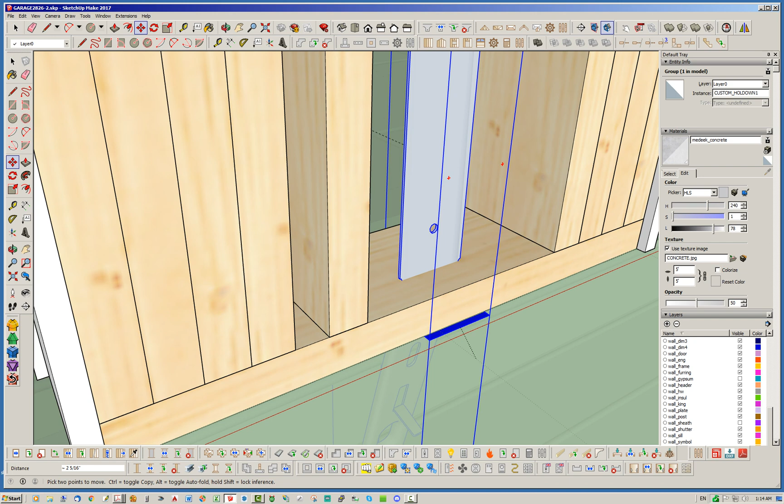I don't know what we're going to do with it here. Let's see—basically, I want to shift it over a little bit. I just want to grab the right edge though, so I don't know, I guess we can just eyeball it first, and then I don't know. We can put it on the king studs, I guess.

I would say about 7.5 inches. Let's go 7.5, see where that puts us. Okay, that looks about right. So now we've got ourselves a strap hold down there, and then it's just a matter of copying them. So we're just going to go like this, hit the control key, and slide over one more, and that looks like 15 inches.

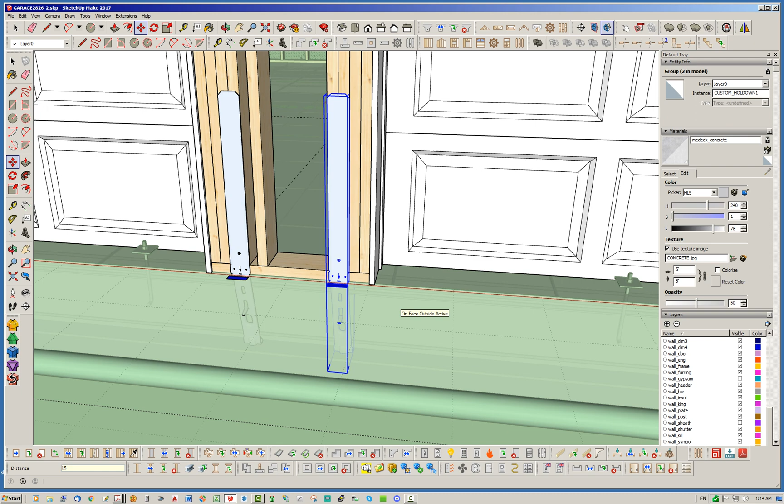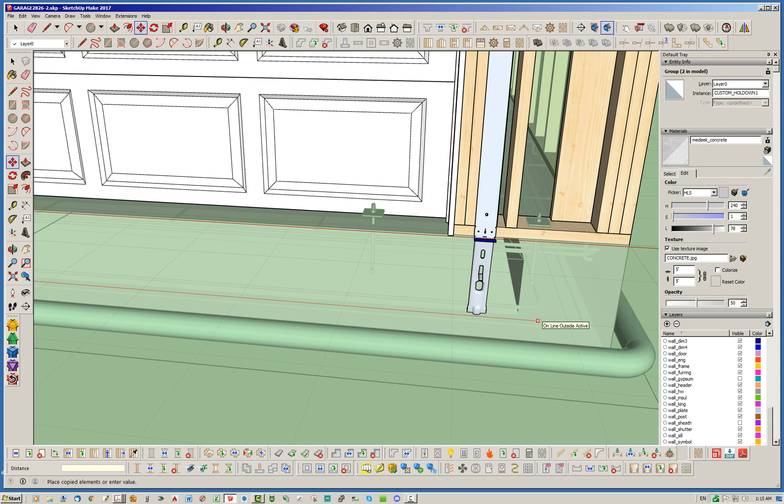Okay, and then maybe a couple more over here perhaps. So let's do that. Hit control again, gives us another copy of it. And I think we wanted to be right about there. So 10 feet, 9 inches. Sorry, this takes a little while.

And then let's grab one more. Just hit control and copy, and then 15 inches is where we need to be, right? Okay—actually, well, no, we need one more. We just need to move that over another 1.5 inches.

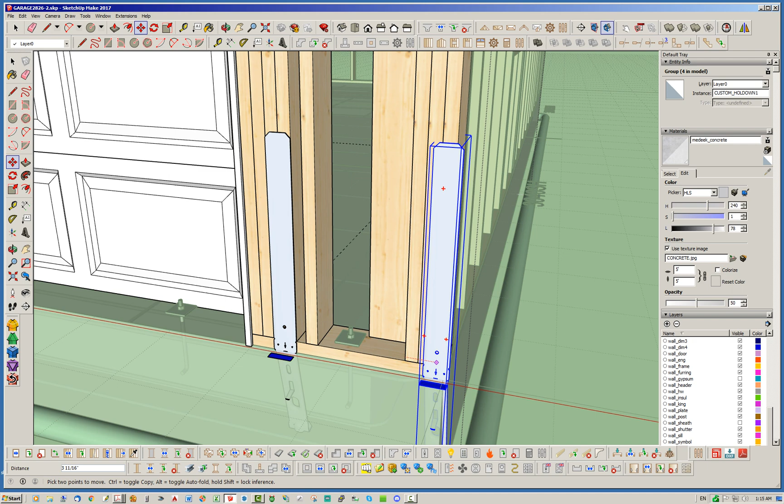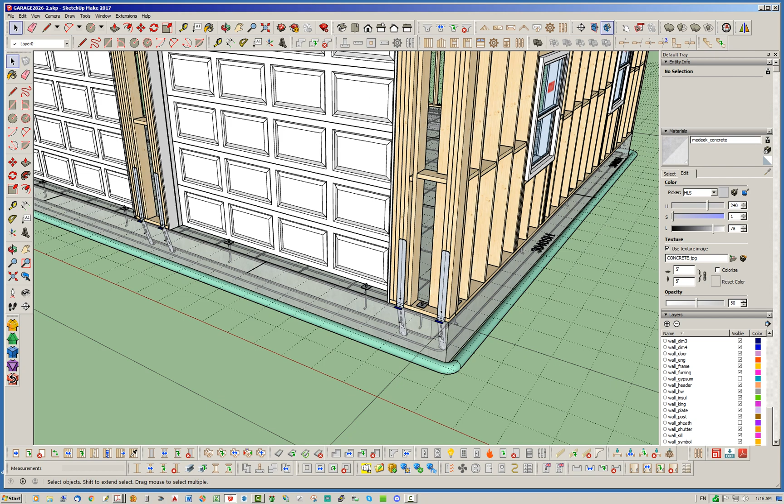Yep, okay. And notice how I didn't put this right at the corner of that concrete. I think the installation rules are that you're supposed to be 1.5 inches from any edge of concrete. And I think that's actually a really good rule, because I've seen these spall out before, and they just create all kinds of messes. So they tend to spall anyways, but if you carefully put them in and work the concrete around them, usually you can get them in there pretty good.

So I like what I'm seeing there. So we've got our hold downs, we've got our shear walls, we've got all the hold downs in the back wall in. We've got blocking, everything. I think we're okay with our headers. Overall, I think I'm pretty happy with what I'm seeing here.

So I'm going to end the first part of this video here, and then I'm going to do part 2 of it where we finish up the rest and add in the electrical and the roof and make any minor final adjustments to this. So, all right, we'll proceed with part 2 after this video. Thank you.